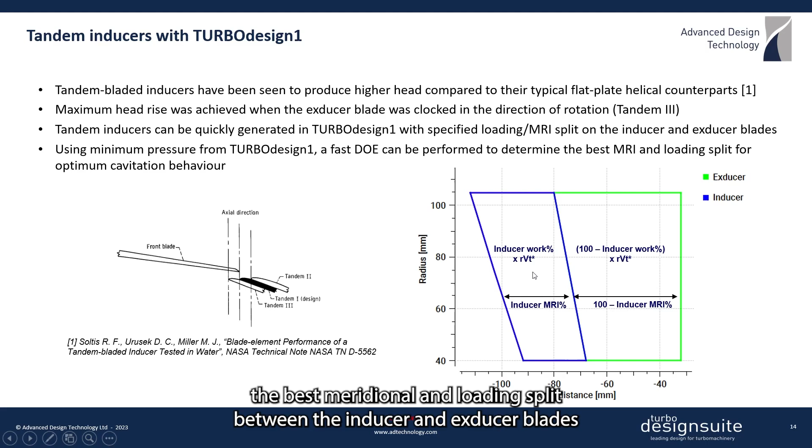Now we have already seen that tandem inducers can be quickly generated in TURBOdesign1 by taking the original inducer and then specifying a particular loading and meridional split between the inducer and exducer blades. And since the blade surface minimum pressure is one of the performance parameters that we get from the inverse design solver, we can naturally use this to perform a fast DOE to determine the best meridional and loading split between the inducer and exducer blades for optimum cavitation behavior.

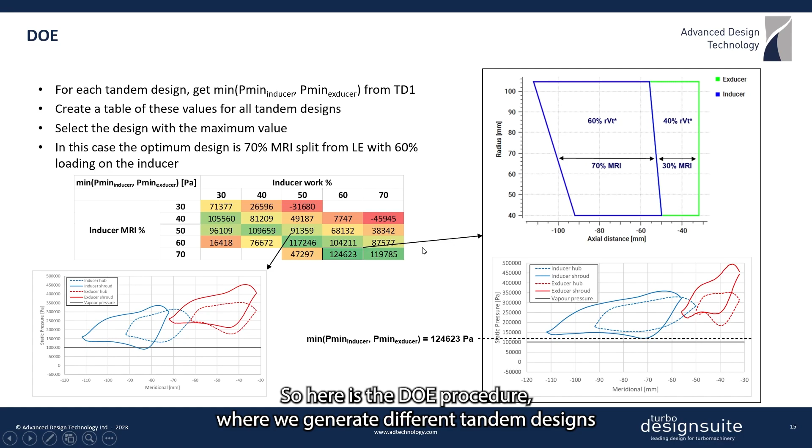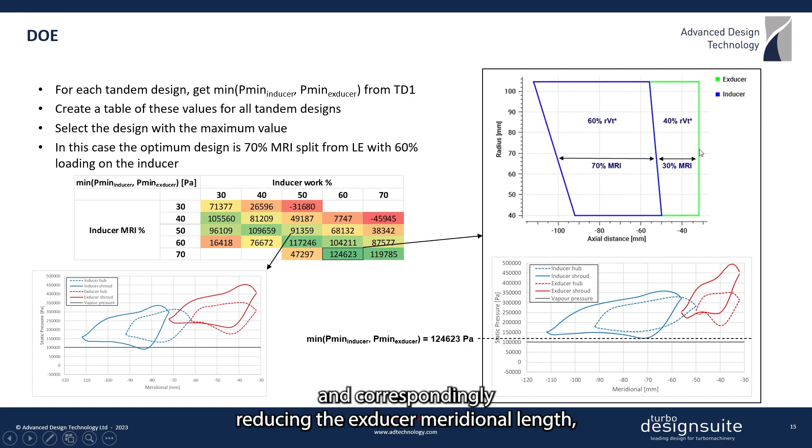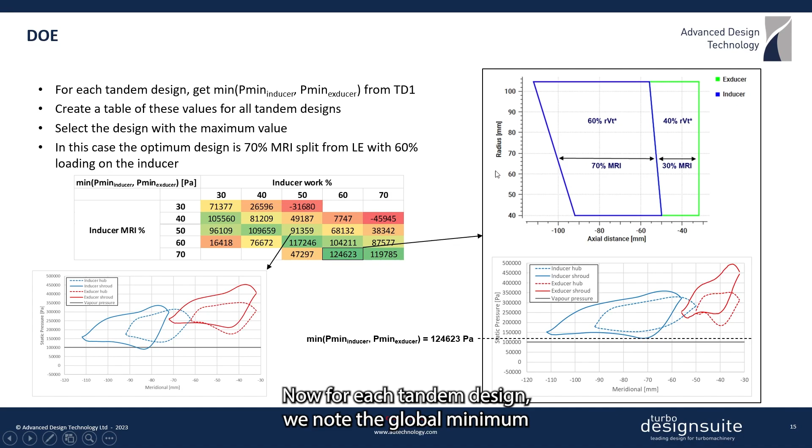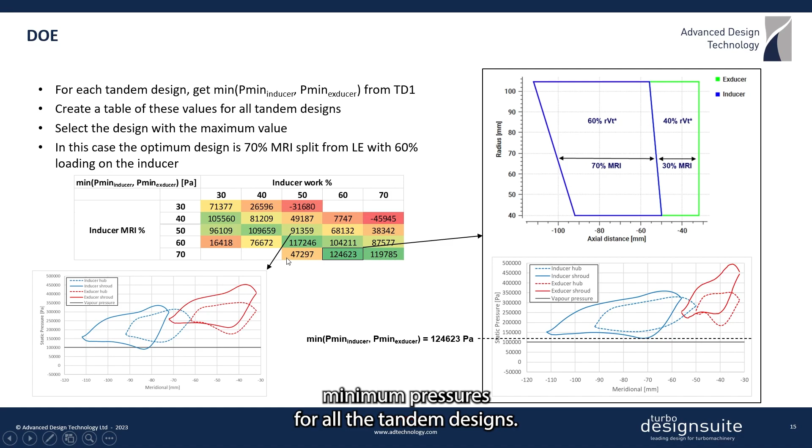So here is the DOE procedure where we generate different tandem designs by gradually increasing the inducer meridional length and correspondingly reducing the exducer meridional length, and also by gradually increasing the inducer work and correspondingly reducing the exducer work. Now for each tandem design, we note the global minimum pressure on the inducer and exducer blades combined, and then create a table of minimum pressures for all the tandem designs.

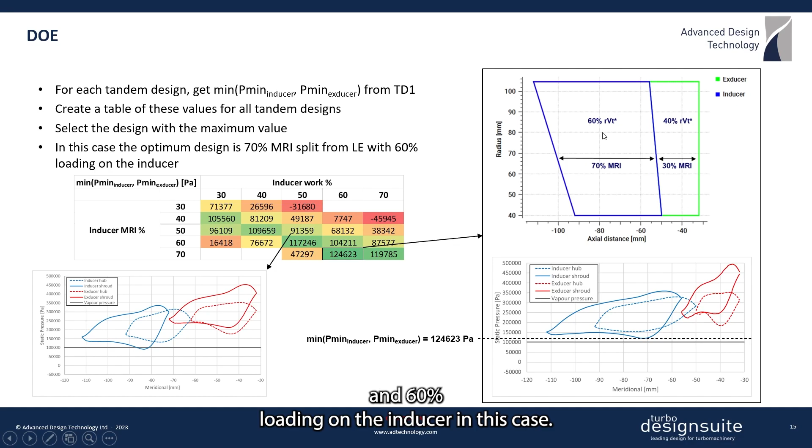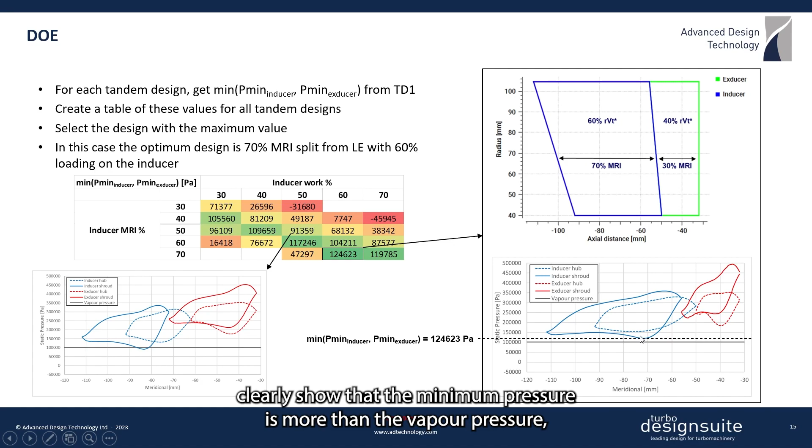And from this, it's very straightforward to pick the design with the highest minimum pressure, which is 70% meridional length and 60% loading on the inducer in this case. And these static pressure plots from TURBOdesign1 clearly show that the minimum pressure is more than the vapor pressure, removing the possibility of cavitation in this design. And so we use this as the final design for the tandem turbopump configuration.

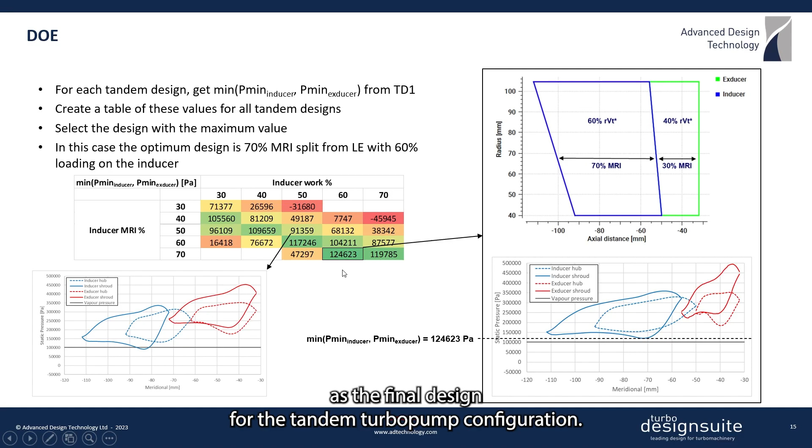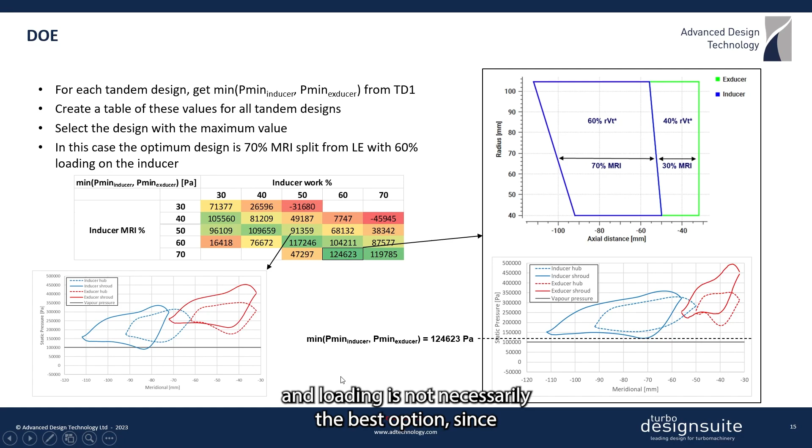In contrast, we can also see that a 50-50 split for the meridional length and loading is not necessarily the best option, since the minimum pressure goes below the vapor pressure in this case.